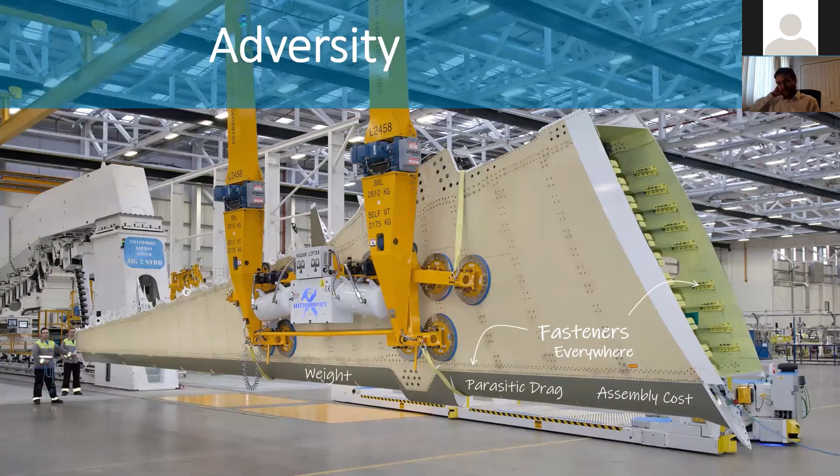And it just led us all to think, is there another way? Is there a better way of doing this? And that was really the inspiration for the idea of using additive manufacturing for hybrid joining.

I've highlighted on the slide just a few of the issues we face, and some of you will have experienced these before. There are probably a plethora of others that I haven't thought to put there. But of course, when you apply fasteners in composites, one of the obvious ones is you've got to drill holes. Drilling holes in composites is hard enough, and the material is very abrasive on the drilling tools. But when you're drilling also through composites and metals in the same stack, the materials behave differently when they're drilled. So the size of the hole, you have to compensate with special tools, and those tools are very expensive and they wear. And when you've got literally tens of thousands of holes to drill, that becomes quite a significant cost driver, not apart from the fact that you've got a lot of assembly operations to deal with, and all the risk of damage and concession associated with that.

And then maybe the ones that started inspiring me at the start, things like weight and drag, just the fact that you've got all these fastener heads, so parasitic drag, you've got all of these fasteners which are weight, and all the joints are doubled up. So you've got flanges which are adding additional weight. And at the time I was responsible for the weight control on the A350 wing, so that was obviously my primary focus.

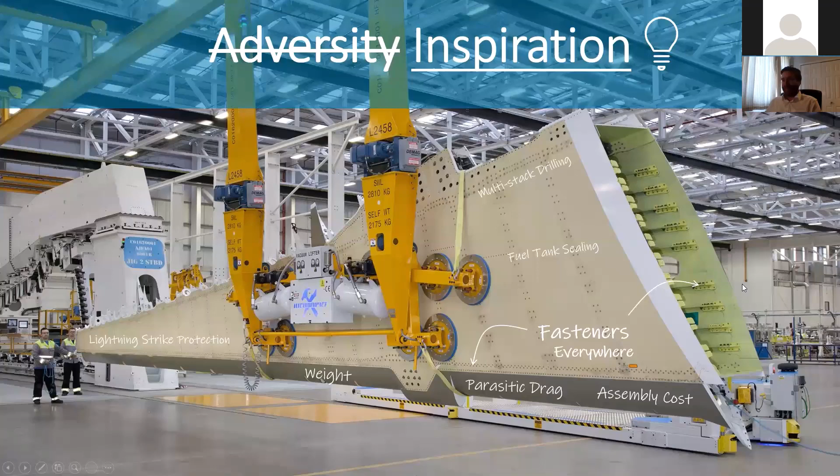With a 200-watt single laser, we really had to focus on what you could do with the technology where you brought value through complexity with the minimum volume of material possible. The initial concept for this type of joint was that we would build these pins, these small arrowhead pins, onto a pre-existing machined bracket. So all we were using additive manufacturing for was building the pins—really grams of material, very short time to process. But in the end, we were adding the value of enabling a whole different joining methodology.

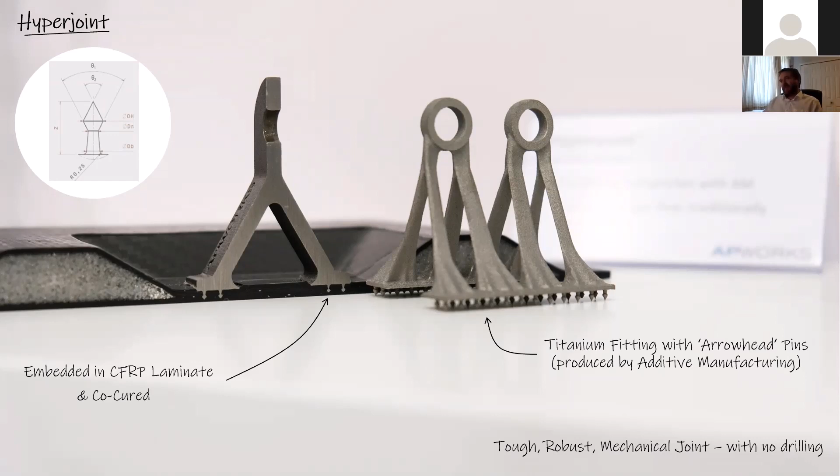Now, for those of you scratching your head at how you get the pins in there, if you haven't got direct experience with composites manufacturing, the obvious thing is you have to embed these before you cure the laminate. Generally we're working with pre-preg materials, meaning you've got fibers in layers, already impregnated with a resin which is still soft—tacky and sticky, but soft. You lay up the laminate, embed the pins, and then cure it in an autoclave generally, making it go hard and locking those pins in place. What you create is a tough, robust mechanical joint without drilling. That was our objective.

Now, obviously, just because we managed to do something that looked kind of cool—and I certainly thought it looked really cool at the time—there's no guarantee that that's going to be a more efficient load path. So we didn't know at first what would happen if we applied load to these things. How would they fail? That was a journey in itself. In aerospace, that's an extremely long journey because you've got to answer questions about every eventuality: lightning strike testing, what happens when it gets hit by a stone on the back face—a simulation of a stone, a ball bearing imparting a certain energy. Does it delaminate? All of these things we had to go through.

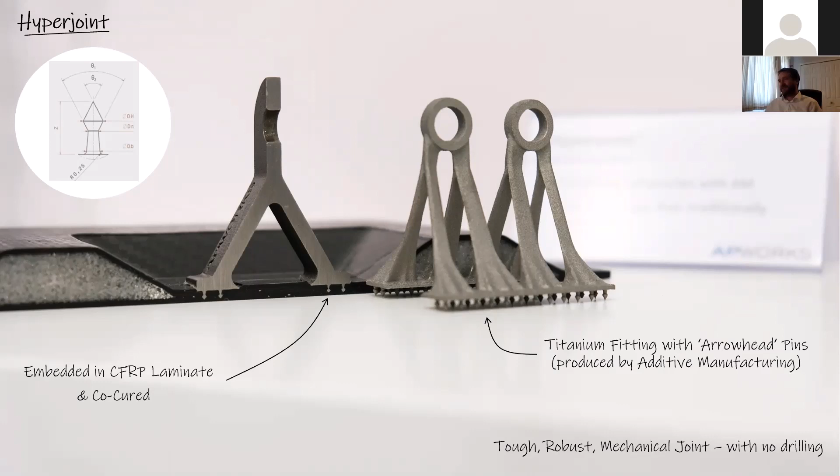I can remember the very first test we did, which is pretty normal with joints, was a lap shear test. I can remember having nightmares the night before where in my dreams these joints were like butter soft and they just failed with no load. You can imagine how much of your own heart and soul has gone into getting to that point, convincing everyone it's a good idea to spend some budget on. But fortunately for me, that wasn't the case, which was largely luck. We ended up with something that really worked.

So a little bit about the integration process: you push these things into the laminate. But what we found quite quickly was that it's also important to have some kind of tooling. From one point of view, you need to be able to fixture the part if you need to maintain tight tolerances. Once that part is in the laminate, assuming you've got more than one of these parts, their relative positions need to be maintained, so you need tooling and fixturing in cases where you need to maintain a relative tolerance between parts.

Locally, you need a tool called a caul tool, which is quite commonly used in composites anyway to maintain a tolerance. In this case, the caul tool is integrating the bracket fitting, so you're slotting it into that tool, and that's helping to maintain the profile of the laminate as you go away from the interface. Otherwise, as we discovered in the early days, you can get a wrinkle in the laminate. Of course, that defeats the object to some extent, because one of the big advantages of the joint is getting rid of the effect of drilling out a bunch of fibers which would otherwise be carrying load.

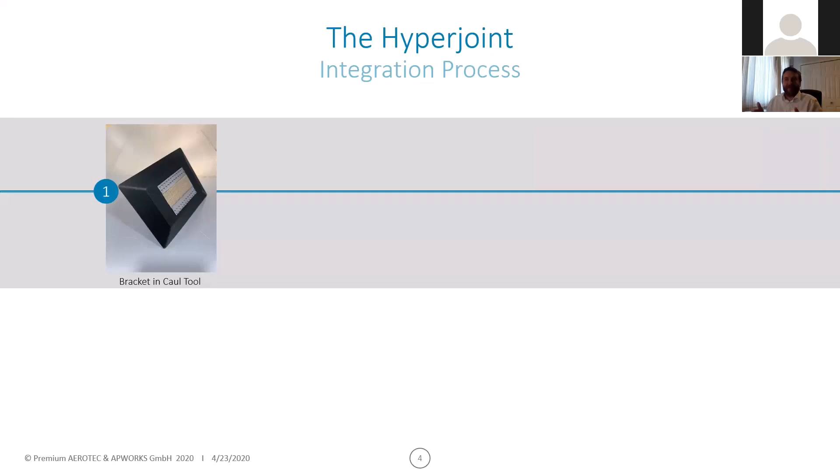Of course, if you create a big ripple in the fibers, that's as bad as drilling a hole. So the caul tool is not just about manufacturing, it's also about achieving the quality in the laminate

and not disrupting the laminate when you're inserting the pins. One of the beauties of the development is that we kept it such that there was minimal impact to the composites manufacturing process. That wasn't always the case. At the start, I can well remember colleagues sitting there with steel rulers trying to thread fibers over pins, but

we pretty quickly realized that was going nowhere fast. So we came up with a concept instead where we had the caul tool. We used traditional processes, either tape laying or fiber placement. And then we could produce a panel.

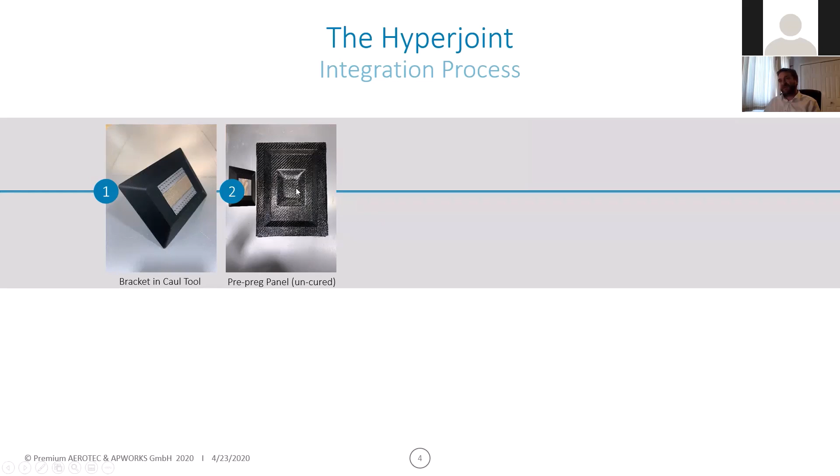The only difference is that before bagging for cure, you're inserting the pins, you're positioning the caul plate, inserting the pins. You've got something that looks like this. In this case, this was done with a hand lay-up.

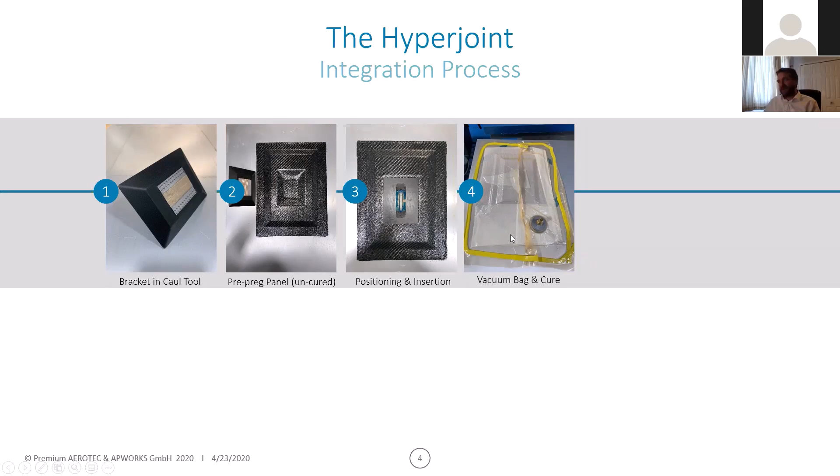Vacuum bagging as normal. Of course, you've got to accommodate the tool. So in this case, there's a small pleat in the bag, which you would position to try and minimize the risk of the bag bursting. You often have pleats anyway on the bag because of various other tools involved in the process.

You're vacuum bagging, you're putting it in the autoclave or the oven, and then afterwards, you remove all this stuff after it's cured, and you've got something which is essentially a hybrid part.

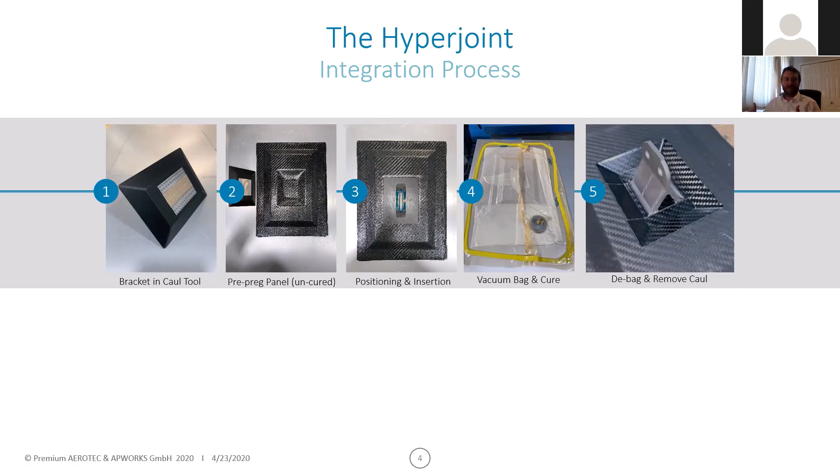So it's tricky to know whether to call it a joint between a metal part and a composite part, because at the previous step it is, but by this point you really talk about a hybrid part. It's part composite, part metal, and they're linked in such a way that it's a single product in the end, without a joint as such.

I'll let you read through that, but essentially the obvious things you can see for this flat or nearly flat panel to do this.

When you get into corners, it's not impossible, and I don't think with the camera - I tried this earlier - you can see this very well, but this is a corner fitting where the pins are inserted. You can do things like corners.

It's just more involved in terms of the tooling, and generally you have a two-step process during this early phase where you lay up and then you're forming around the pins and then bagging and curing. So it is possible, but it's more difficult.

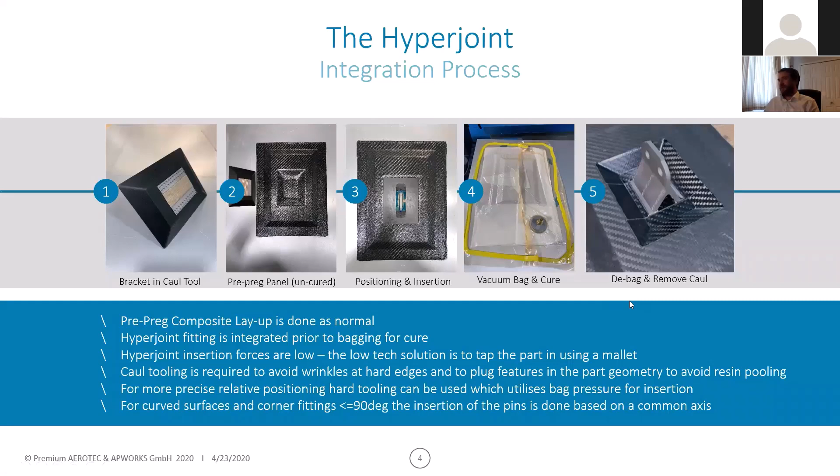That's the main overview of the assembly process. The next thing everyone always asks is how strong it is, and as I alluded to earlier, we didn't know at the start. Of course, we know pretty well now, and without going into lots of detail, we have lots and lots of test data.

Just to give you a simple comparison, if you talk about shear strength, which is essentially taking the bracket and trying to move it in the same plane as the laminate, the strength of the joint depends upon the parameterization of the pins, how you design the array. But 50 megapascals as an average shear strength is quite achievable.

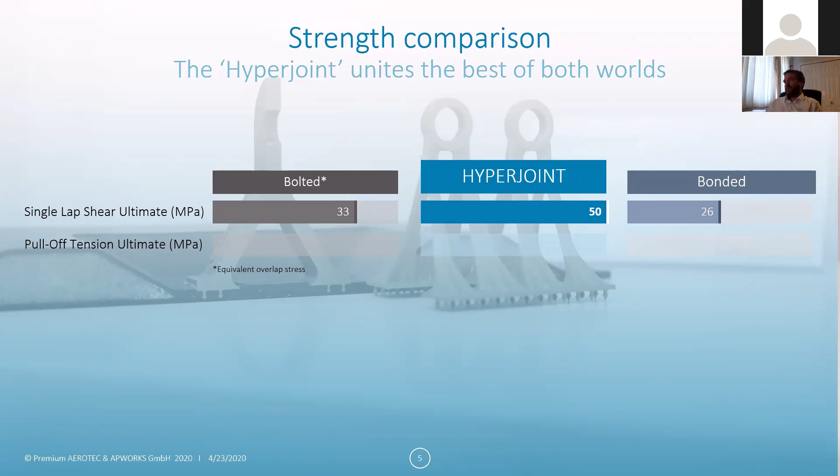And when we talk about thicknesses of laminates in the range where this is applicable, ideally 3 to 7 millimeters, that's quite competitive compared to a bolted joint - a higher ultimate strength than a bolted joint, and also higher than a bonded joint in pure shear.

If we talk about pure tension, pull off, trying to basically pull it out of the laminate, it's quite substantially stronger. The main reason is that you've got so many local areas that are really gripping deep into the laminate. So you're generating a lot more resistance to failure than with a single fastener head, or

in the case of a bonded joint, generally you just remove the first ply. If you've got a good bond, you just take the first ply, the first thin layer of carbon off the rest. So that's, of course, a big advantage.

And when you combine both of these, the biggest benefits are where you get into things which normally bonded joints really struggle with, which is big peel forces. So when you have combinations of shear and bending, that's where this really comes into its own, because those pins act like little anchors, little beams that also can react bending forces into the laminate.

So, to my delight at the time and that of all the colleagues working on the project, it ended up being a very strong joint. And that led to years and years of development on the project, with the view that the next composite aircraft, whenever it may come, this technology would be applied.

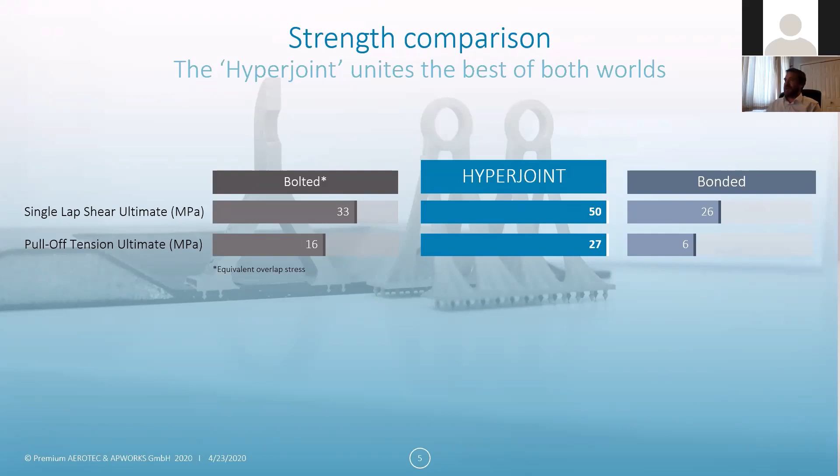And so that's one of the reasons we wanted to share this with you all, was to say, look, if you have ideas about where this could be applied to solve a problem that you face, then come and speak to us, because that's really our role, is to transfer these technologies, which have been developed in aerospace for very good reasons, to areas which could also get benefit from these technologies, but in a shorter time frame. And that's really what we hope, other than just some pure curiosity, that you get out of this presentation.

So hopefully I haven't overrun too much, Angela, because you know how much I love to talk, but I think we're pretty much on time, considering when we started.

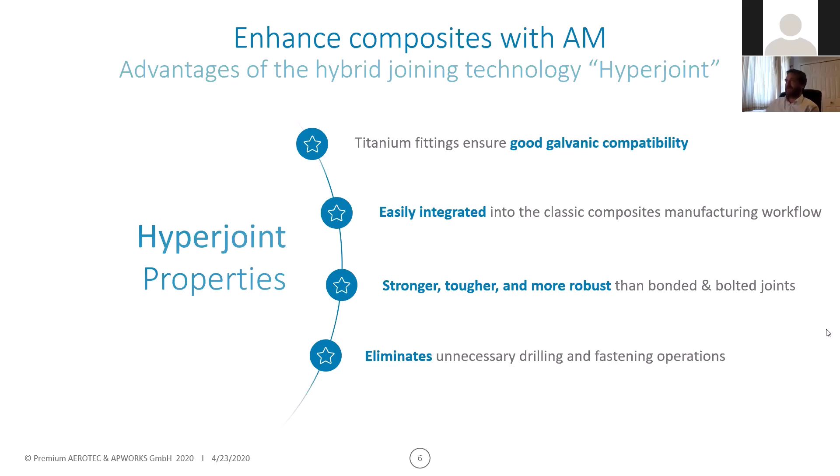So I was wondering if anyone wants to raise their hand, be brave, and ask any questions. You can go as technical as you like.

So I have a few questions. Right, let's have a look. Steve, do you have an experience using overmolding structures like lattices?

Could be useful. So in fact, I mean, I would say this is a form of overmolding, essentially. So the hyperjoints themselves, the pins, are an array of essentially overmolded elements, the advantage being that you don't need to physically lay the plies over them. You push them through, and the autoclave pressure, or the resin flowing back into those spots, is what is then bringing fibers back under the heads. So that's really the main advantage. But I would say it's analogous to overmolding in that respect.

Surface roughness considered. Yeah, so true that high surface roughness - so the comment here from Rielson Falk is, what's the surface roughness considered? Now, actually, we try and improve the surface roughness, and it might seem counterintuitive, considering that you would expect roughness to give you more surface area for bond adhesion. The reason we try and reduce the roughness is actually to try and improve the fatigue performance of the joint. So there's a trade-off to be had between adhesion and fatigue performance.